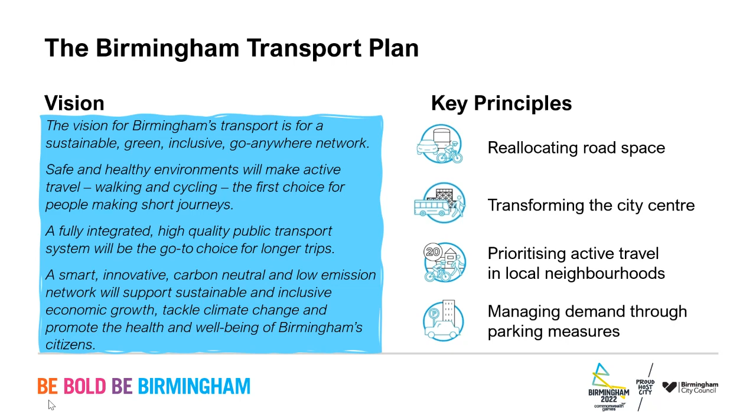So for this evening, I've just done a quick map to remind us where the city centre is. Generally, when we talk about Birmingham city centre, we're talking about the area within the Middleway Ring Road, the A4540. But the two schemes we're talking about today are in the Colmore Row area, around the Anglican Cathedral, Pigeon Park area. Just zooming in a little bit there, to give people an idea of where we are.

So we're talking about the Temple Street, Bennett's Hill, Newhall Street area, and the two projects we've been working on in this area for some time. We're actually presenting some phases that are not the first phase of any of these projects, so these are not completely new. We've been working for some time, particularly in partnership with the Colmore BID and the Central BID in the city centre. The two schemes are the city centre public realm, which Craig will speak to us about in a moment, and the Snow Hill public realm scheme.

That is the area around Snow Hill station. But the final point I want to make before I hand over to Craig is that as the project managers talk through some of the proposals to help you respond to the consultation, they will talk quite a lot about the traffic management, that is how we manage the vehicles in the area.

These schemes, however, are predominantly about making space for people and enhancing the quality of the environment, the built environment in the area. However, in practice, we need to get the management of the few vehicles that will be allowed into the area right, so we end up talking about that quite a lot. But I want you to have in mind, don't lose sight of the fact that this project is about transforming what the place looks like.

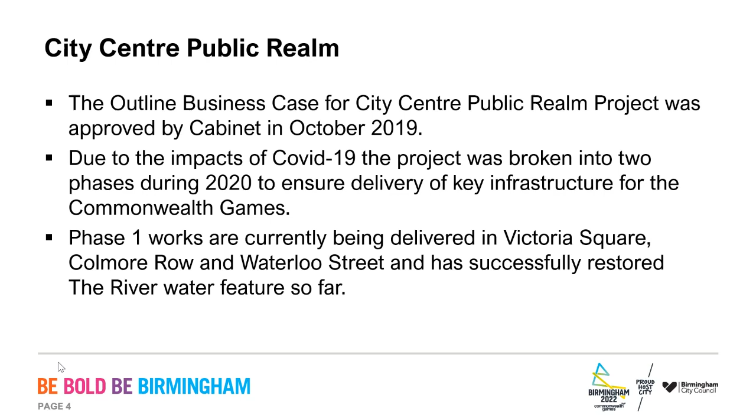Echoing Rebecca's comments, the City Centre Public Realm project is looking to improve the street scene with high quality granite within the city core. Our important context here is creating an attractive yet safe and accessible space.

We'll do that by improving the hostile vehicle mitigation, which is well presented in the leaflets and the information on Be Heard.

What is hostile vehicle mitigation? HVM for short is tested, rated infrastructure such as bollards and planters. These come in a variety of different manners: static, movable, removable, and mechanical.

Why do we need it? If we're putting the demand back with the pedestrian, a greater volume of pedestrians means greater crowded space areas, greater areas for pedestrians to get together, and that needs this permanent infrastructure.

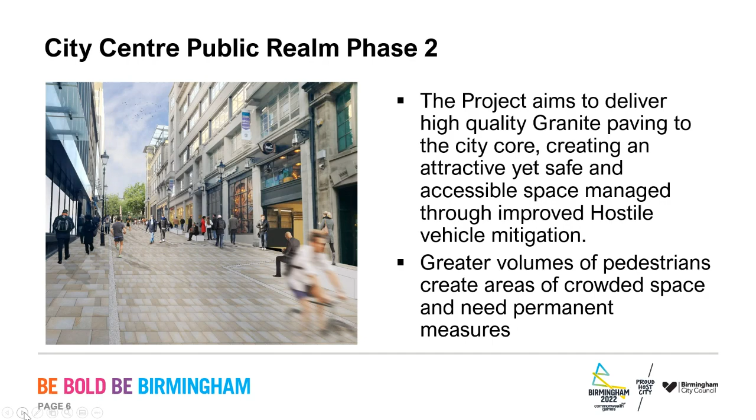If you're aware of the city centre at the moment, we have some large items, some black obelisk-shaped bollards which protrude a lot of the footway, with some yellow drop-down arms. These are all temporary infrastructure placed to support our events teams and the annual Frankfurt Christmas market. The scheme aims to remove these and replace them with permanent measures.

Thanks, Rebecca. Apologies for the change in format, but this was the best way of showing you the plan which is within the leaflet, and again which is on Be Heard. This is a scheme plan and answers the question of what the City Centre Public Realm project is doing.

Working from left to right on the page, to the rear of the council house we have what is known as Chamberlain Passage, the extension of Edmund Street. That's a follow-on from the Chamberlain project delivered a short while ago, and we'll see the extension of paving and street furniture removal within Chamberlain Passage, and the introduction of permanent hostile vehicle mitigation to manage the crowded space, which is Chamberlain Square.

Down the side of the council house, and everybody's favourite coffee shop Starbucks, you'll be aware of Eden Place. Again, we're connecting that street scene with improved lighting and pavement. Joining the dots and connectivity, we have Phase 1 Public Realm in the middle, Victoria Square, Colmore Row, so you'll now see how Phase 1 joins up with Phase 2.

As we move through Victoria Square, we'll complete the works on the steps, then down into New Street, where we'll extend the public realm with improvement in drainage, lighting and pavement, through to the junctions of Corporation Street and New Street, where the metro tracks join.

Off New Street we've got roads such as Ethel Street and Lower Temple Street, where again we'll remove the rather unsightly hostile vehicle mitigation, which is at the moment temporary apparatus - we're grateful for the support of our Colmore retail BID for planting, but they will go. Permanent mitigation will sit at the junctions.

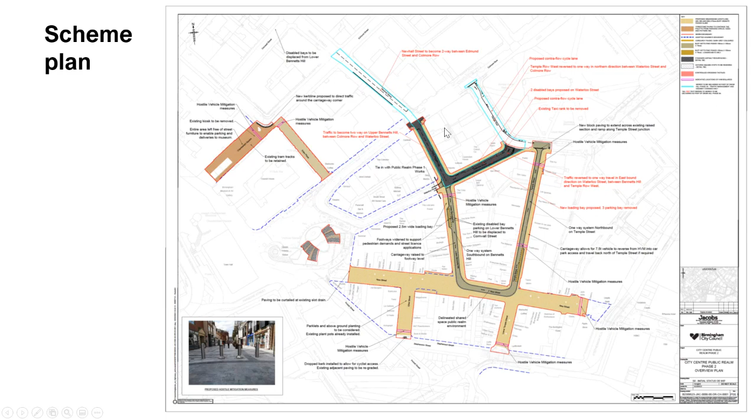Thanks, Rebecca. Okay, we have done public consultation before, in January and February 2020, and I think you can all probably understand why we're doing it again. We've had that C word, and COVID-19 has created change. By consulting again, it helps us understand the level of that change. Our visitors, commuters, residents, businesses, those who are coming to socialise, have all changed in some way, shape or form. Coming back out to discuss the scheme with those who are potentially new residents or new businesses is really important for us, and not just assuming what we've had before.

Felt it important to give you guys an insight into the previous feedback. We've not thrown it away, we've kept it, stored it, and reviewed it, and it's helped shape some of the preliminary design we've done and some initial changes since we last consulted. The key is that 78% strongly agreed that the scheme was welcoming and attractive, with a supporting 72% of all respondents strongly agreeing or agreeing with some of the proposed traffic management, vehicle access and loading restriction changes. Those are the positives. We did take away some negatives too, such as the need for improved provision for cyclists, and my colleague Rob Bird, part of the Snowhill Public Realm scheme, will share a little more on that shortly.

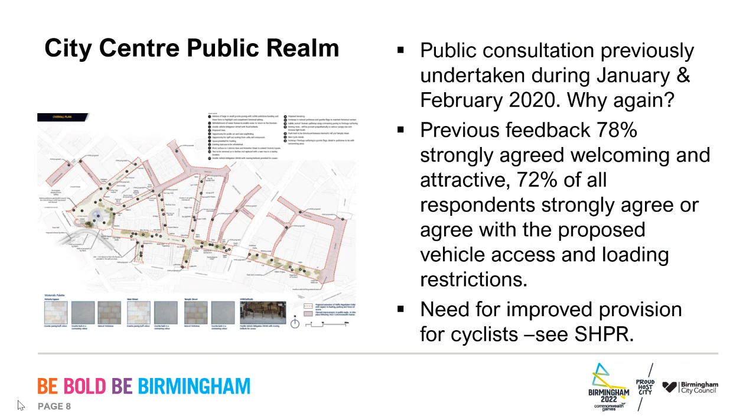Some of the major changes we've looked at from feedback are around the traffic regulation orders and how we manage vehicles into an area of demand that is now with the pedestrian. Particularly taking feedback from our residents before around permitted vehicle access for off-street car parks, these will be regulated via the central control room that manages the hostile vehicle mitigation in the picture adjacent.

Also for our businesses, we've got a more sympathetic access and loading restriction proposed between 11 PM and 11 AM. Previously we consulted on a far more restrictive 7 PM to 7 AM. Some of the feedback was that our businesses needed to change the way they operate, needed to bring in staff sooner. In some areas of the city, particularly Temple Street, we now have a thriving nighttime economy with a greater impact of pedestrians. That extension to 11 PM safeguards those people.

And of course, we listen to our residents. Oh, jumped the gun there, Rebecca, you did so well.

Of course, we listen to our residents and what was meant by permitted vehicle. Listening to our residents, the permitted vehicles give consensus towards emergency healthcare professionals and out-of-hours contractors that need to be considered. We'll undertake that work in the exemptions and exclusion sections of the traffic regulation order, which will go for a statutory consultation later this year.

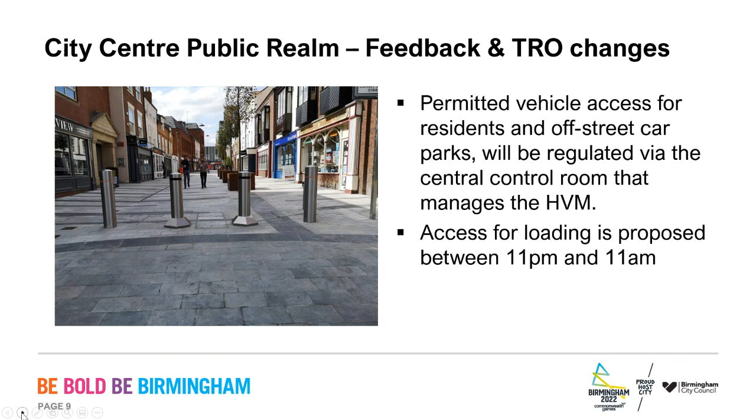One of the final changes we've been able to identify so far is the need for the reversal of flow of traffic on Temple Street to Bennett's Hill. It currently operates southbound from Temple Street into Bennett's Hill. My colleagues shortly will talk about future changes in the city and how future access to the area is granted, but one of the main things we've looked at is how heavy goods vehicles and our service vehicles enter and exit the area, and how the number of left turns and right turns work strategically and engineering-wise with the hostile vehicle mitigation and the demand on the public realm.

Our next stage in the design process is key: early contractor involvement. At this point, we'll be reaching out to our Central and Colmore BIDs and some of our residents' associations, taking the information that businesses share with us around their needs for loading, unloading and access, and looking to put rates, measures and contractor involvement in place to help shape durations of the scheme. That will feed into a developed construction sequencing, supporting when, where and for how long construction works take place.

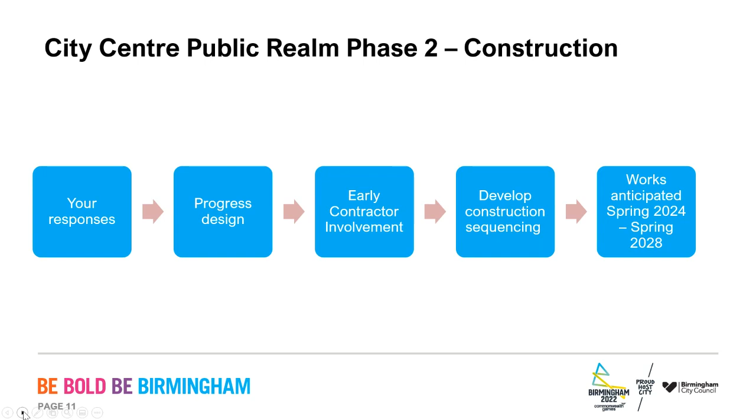At this moment in time, we're expecting and anticipating works to commence in spring 2024 and last until spring 2028. Thank you very much, Rebecca, and that's City Centre Public Realm complete.

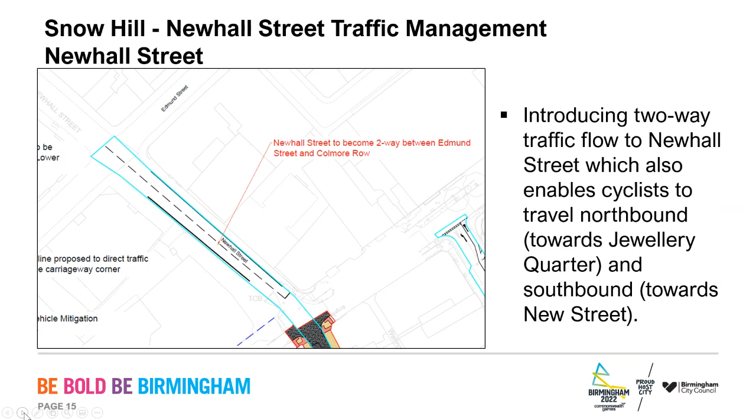As we move on to the next slide, one thing I want to point out is the difference between this scheme and other Snow Hill schemes we've delivered to date: it's not a public realm scheme per se. It's more changes to traffic management, but it enables public realm treatment in future. Using Craig's scheme as an example, if you focus on the grey, that's the changes to the carriageway, but you can see the footways too. We're doing the work we need to do, and then Craig's scheme comes along during their programme afterwards and does the public realm measures. It's an example of the two schemes working together, coordinating the works.

That's a message we've put in the leaflet as well, to try and keep disruption to a minimum where we can.

Focusing on this particular slide, the main thing we're doing is creating two-way traffic. Currently Bennett's Hill, where you've got the Wellington Public House - that's roughly where Rebecca's pointing - that traffic flows in a northerly direction towards Great Charles Queensway. Because we're making it two-way on the other side of Colmore Row, we're making it two-way here as well. The idea behind that is it'll help with movement around the area, and when we get onto Waterloo Street you'll see why that's needed.

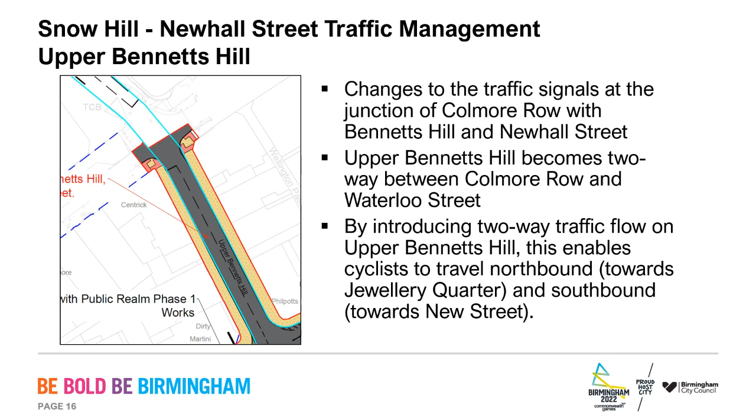Okay, thanks Rebecca. So Waterloo Street then - Bennett's Hill being changed from one-way to two-way. Waterloo Street currently flows towards Victoria Square. We're changing the flow so it flows in the opposite direction towards the cathedral.

What this is doing meets a cycling objective we have, to unlock areas of the city centre that were previously closed. Currently cyclists can't travel in this direction - this enables it. The one thing I should mention, while you can see Bennett's Hill on the page as well.

Making Bennett's Hill two-way, making Newhall Street two-way, unlocks travel towards the Jewellery Quarter. That's not something we've got at this precise moment in time, but speaking with various groups, it's received some positive attention, which is what we want.

The other thing we're going to do - already we're opening travel to cyclists in a direction they haven't already got. We're also proposing a contraflow cycle lane travelling in the opposite direction, towards Victoria Square. So this will allow two-way cycle travel, opening up more areas of the city. Using the contraflow lane, you'll be able to go right up Bennett's Hill - that works with Craig's scheme. You'll be able to travel down Bennett's Hill, or go straight on towards Victoria Square. It opens up a few avenues.

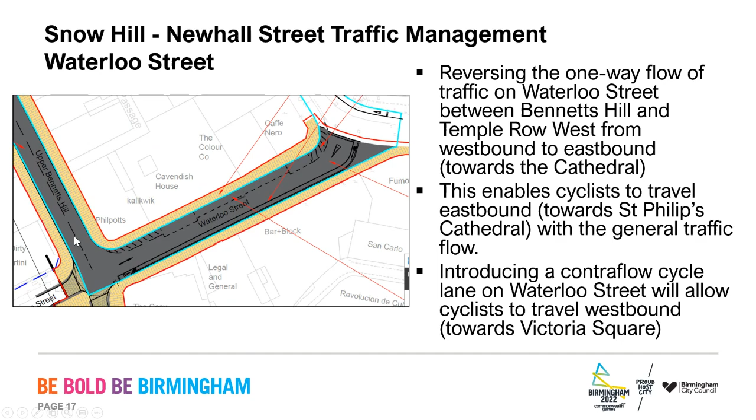If you have a look at Temple Row West - thanks, Rebecca. The one thing I should mention before I talk about it: for those of you who know the area, you'll know there are currently some temporary build-outs we've put through during the COVID-19 period. Our design has been based on those being in place. Separately, we're aware of another consultation that will be coming in due course about those.

So to give you the update on that - it's obviously a separate scheme, but that will be coming, and we are working with the project managers behind that scheme too, so everything works with that scheme as well.

Onto our scheme then - again we're changing the flow. Currently this flows in a southbound direction, and we're just going to flip it the other way, so it travels towards Colmore Row. The other thing we're going to do, to complement the contraflow cycle lane on Waterloo Street, is provide a contraflow cycle lane on Temple Row West as well. That will meet up with options to carry on towards the rest of Temple Row or Temple Street, and cyclists can also go down Waterloo Street.

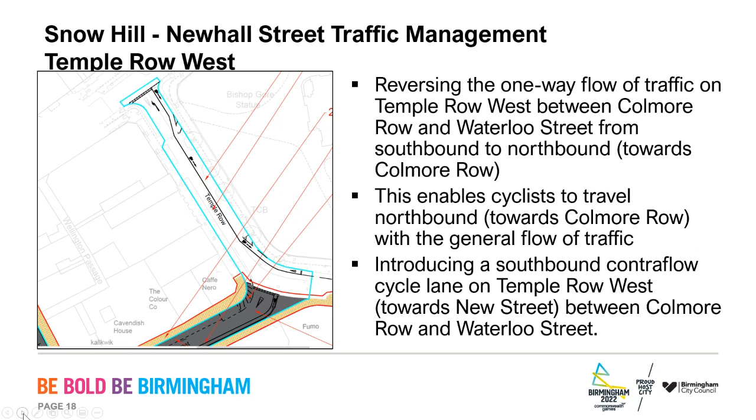When's all this going to happen then? So, what's happening next? So again, we're in public consultation.

Unlike Craig's scheme, this is the first time that we've gone to consultation. So obviously we're very keen to get some feedback on the plans and get some views on what we're doing. The responses you provide, either through this session or through the leaflets and questionnaires, will go to help us.

The next stage is what we call detailed design, where effectively we take the feedback from consultation, look at it, and see what can be incorporated. So we go into more detail, and we see what actually does work.

What we find with consultation is there's always some really good stuff, local knowledge we don't have, so it's picking up on that - oh yeah, we need to account for this - and trying to work as much in as possible into the design and enhance what we've already got.

Once we've gone through the detailed design stage, there's what's called a Traffic Regulation Order, or TRO. Effectively that's another consultation, but it's more a final consultation on the plan, where we're formalising the changes to the roads to get public opinion and so on.

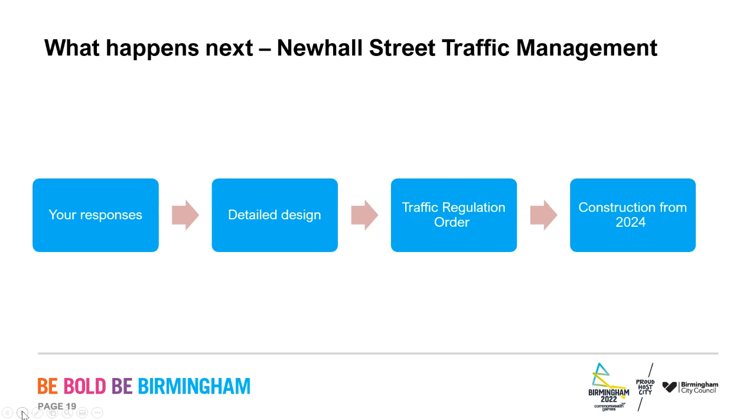But that's it from me on Snow Hill, Newhall Street, and I think it's back over to Rebecca. It is, yeah. Thank you, Rob, and thank you, Craig.